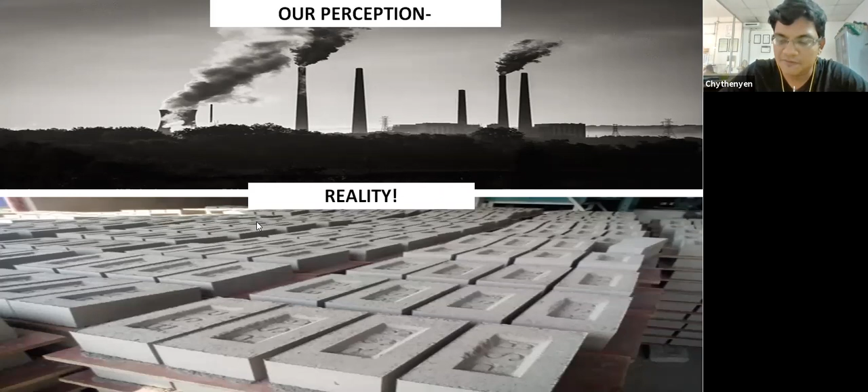Coming to this problem, what we look at today as waste - India is the second largest producer of municipal solid waste in the world at a whopping 1.5 lakh tons of waste every day. And 50% of this waste is wet waste or organic waste. So this is one problem according to us.

And the second problem we are facing today is the huge energy demand. India is the second largest consumer of LPG, liquefied petroleum gas, at a whopping 24.9 million tons of LPG in the year 2018 and 2019. This is a straight jump of 53% just 5 years back. So the energy requirements of this growing developing country is increasing day by day, and we today are looking at it as a problem.

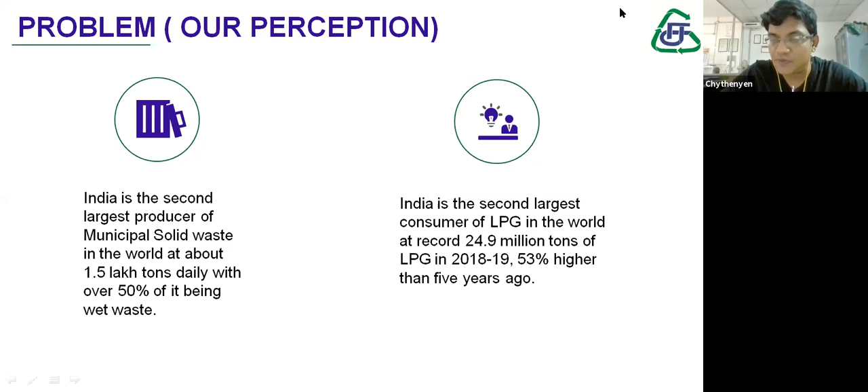So we are here today to change that perception. What if we can use these massive, huge quantities of waste to generate clean fuel? What if we are able to manage all of this waste and also produce organic manure? Will that not be very beautiful? Will that not be a very big boon for our country? So how can we do this?

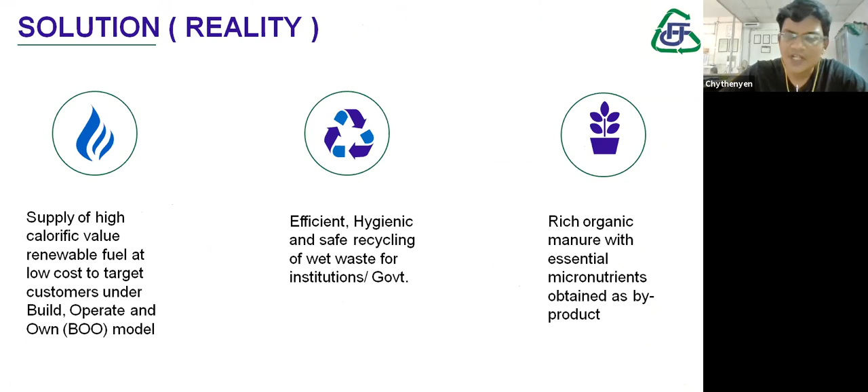So today we are talking about the concept of conversion of organic waste into fuel. The process of conversion of organic waste into fuel is called anaerobic digestion. So we are going to degrade such waste - agriculture waste, food waste, paper waste, waste from cattle, dairy waste - into something called biogas, through a process called anaerobic digestion or biomethanation.

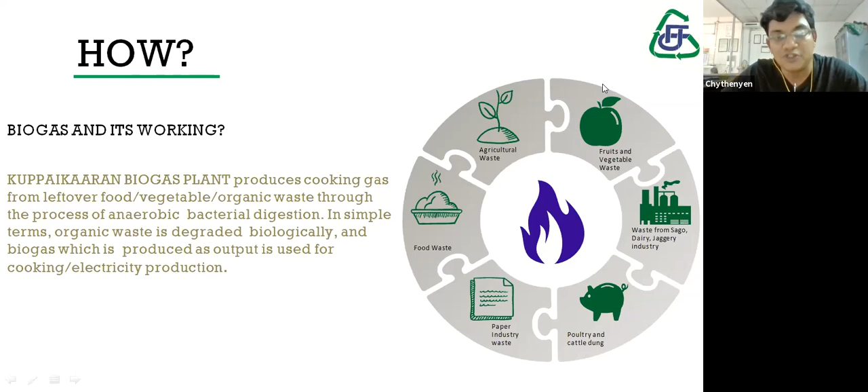In this particular process, we are going to break down these organic wastes with the help of anaerobic bacteria which live in the absence of oxygen, and convert it into biogas. So let us briefly have a look at this technology.

So all this food waste and vegetable waste are broken down into smaller particles. These polymers are broken down into smaller particles using the process called hydrolysis. Hydrolysis means nothing but breaking down - lysis means breaking down, so breaking down of larger molecules into smaller molecules.

That's the first step. The second process is the conversion of this waste into acetic acid - these broken down particles are converted into acetic acid, CH3COOH. This process is called acetogenesis, and the bacteria involved are acetogenic bacteria, which are anaerobic bacteria. The final process is the conversion of this acetic acid into methane and carbon dioxide. As a matter of fact, methane is the cleanest hydrocarbon we have on Earth today.

Methane is CH4, one molecule having one carbon atom and 4 hydrogen atoms. Whereas LPG is propane and butane, which is C3H8. So when one molecule of methane is burnt, we generate around one molecule of CO2 because it has one carbon. Whereas in propane and butane, we have more carbon atoms, so more carbon dioxide is released.

So methane is also called the safest and cleanest hydrocarbon on Earth. This biogas produced out of this process will have around 60% methane, 40% carbon dioxide, and traces of hydrogen sulfide and water vapor.

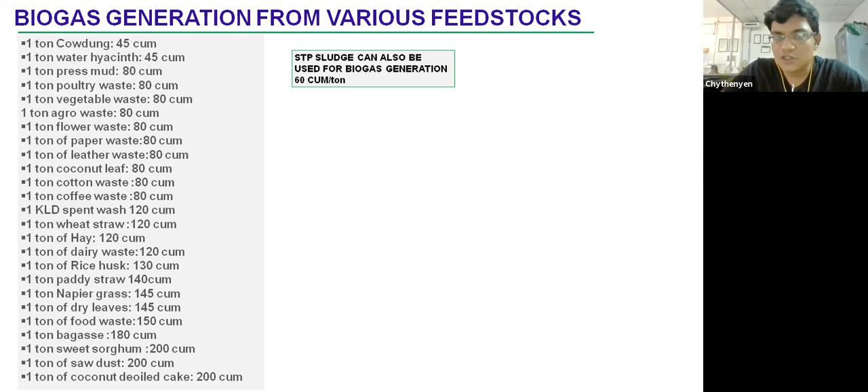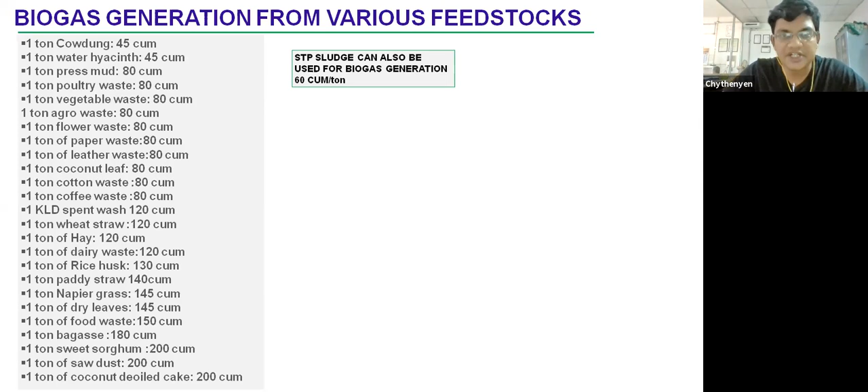We have given an example of around 15-20 different types of waste, right from cow dung to poultry waste, paper waste to leather industries, rice husk, napier grass. There are different types of waste materials which can be put inside this biomethanation plant. We can also use industrial STP sludge from sewage treatment plants. In case your industries or institutions have these plants, you will generate huge quantities of sewage sludge, which can also be used for generation of this renewable energy.

We know that Delhi is the most polluted city in the country. The air quality is so poor that the government has to declare holidays for school going children. We are in such times where the air quality is so poor that there are statistics saying living in Delhi for one day is like smoking 25 cigarettes a day. One of the major reasons for this is stubble burning in nearby states like Haryana and Punjab. When stubble is burnt in these states, the air quality in Delhi goes very, very bad.

So today we are looking at this technology where this very same stubble can be used for generation of clean renewable energy. Even the stubble can be used for generation of high quality biogas, which in turn can be used for various thermal and transportation purposes and even for electricity generation.

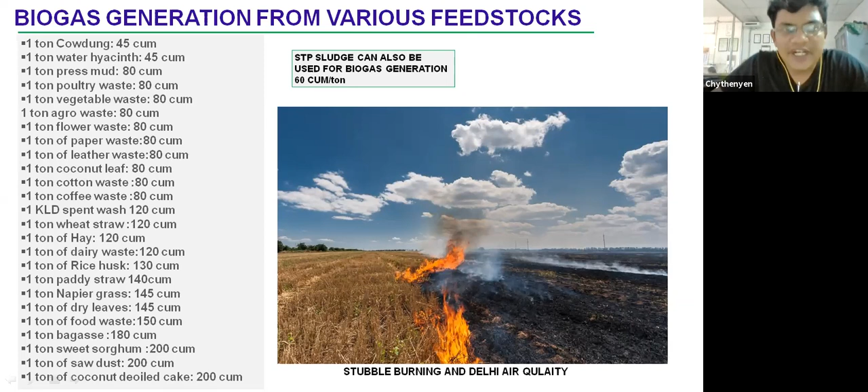Now I'm going to share about our experiences of working with different industries and how different industries have benefited from their own waste, just because their perception of waste was different from the rest of the crowd. Just because they thought this waste can be put to some good use, they have reaped rich dividends. Each and every industry has reaped rich dividends.

I can share first about various industries which have industrial canteens. We have 400 plus biomethanation plants installed in various industrial canteens, wherein their industrial food waste and canteen vegetable waste is utilized for the generation of biogas. This biogas is again used to replace their LPG requirements, so their consumption of LPG has come down drastically by utilizing their food and vegetable waste.

So the second example is the dairy industry. This dairy industry also, around 10 years back, was a highly polluting industry. There were farmers and landowners near these industries who used to come up in arms to these factories demanding the closure of these factories. And the reason? Their wastewater.

I come from a city called Salem, and here we have a dairy which generates around 5 to 7 lakh liters of wastewater daily. 10 years back, this wastewater treatment was a huge problem for them. But then this wonderful technology of generation of biogas from wastewater was developed. Waste, which was once considered a huge problem, then became a boon for them. They started generating biogas out of it, and today their entire wastewater treatment is run from the electricity generated from this particular biogas.

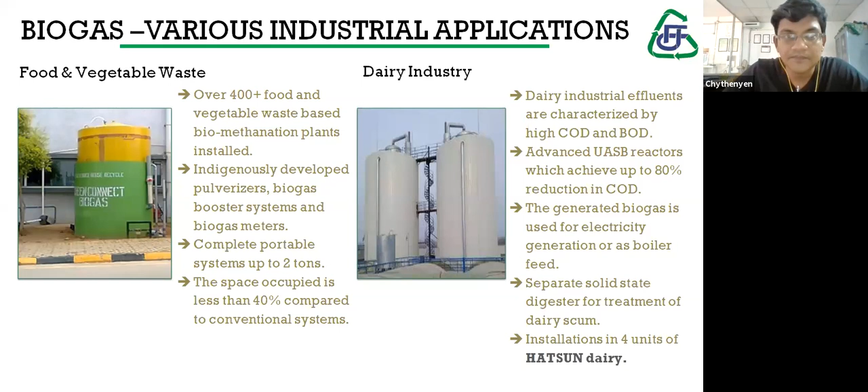The next is the paper industry. The paper industry also has huge quantities of wastewater generated in the process of manufacturing paper. So this wastewater, which is high in chemical oxygen demand, is utilized for generation of biogas. And then we have the poultry industry and the cattle dung.

So in the poultry industry today in Tamil Nadu, Namakkal is number one. In fact, for the entire country, Namakkal is the egg supplier. They are the leading producers of egg and chicken. So these industrial belts, these clusters, have huge quantities of poultry litter and related waste. This poultry litter can be utilized for generation of biogas and conversion of that into a very good fuel.

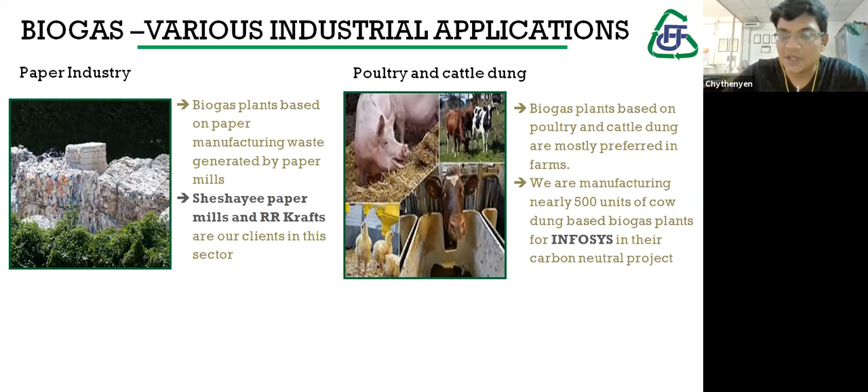And then we have experience in working with PLA, which is polylactic acid. We have worked with this Netherlands-based company called Total Corbion. So these waste plastic cups are utilized for generation of biogas. And also we have worked with the biofertilizer industry, T-Stanes, wherein their media waste is used for generation of biogas.

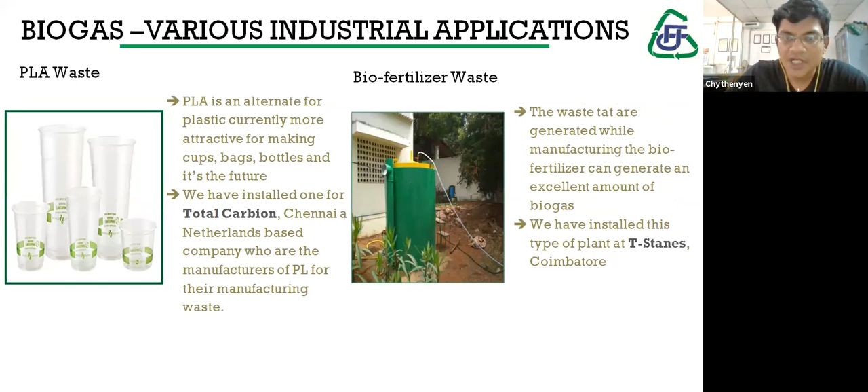And then this is a beautiful project we are currently pursuing along with Infosys. Infosys is the first Indian company to be declared carbon neutral, and Infosys won the United Nations Global Climate Action Award for Climate Neutral Now. And we are happy to share that we are their Indian vendor for manufacturing 500 such biomethanation plants and installing them in various districts of Karnataka. These biomethanation plants are also a part of their CSR budget.

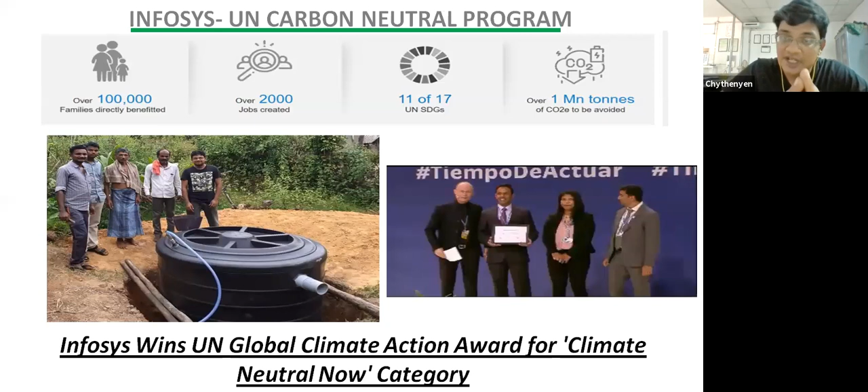And each single biogas plant has the potential to offset about 3 to 5 tons of carbon dioxide every year. And it is fulfilling around 11 sustainable development goals of the United Nations, including poverty, zero hunger, clean air. People living in remote villages use firewood, and when they use firewood for cooking, the smoke affects their indoor air quality and causes various health problems. So the alternative is a clean renewable fuel obtained from their cattle dung and other household waste. That is one more example of our project.

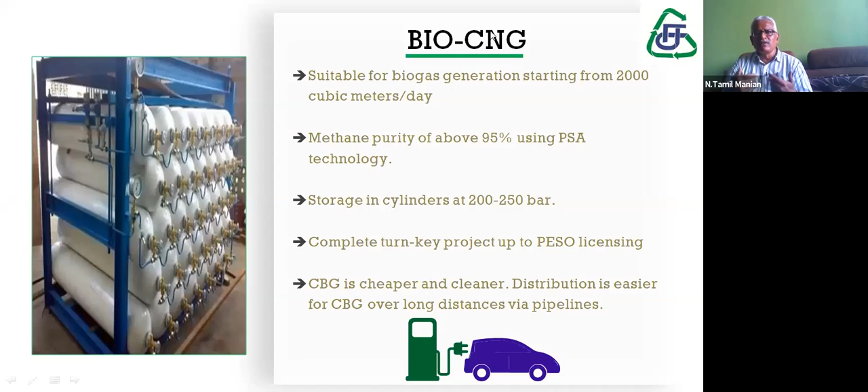We have understood what is need and what is want. Because of the economy, we have been buying; we want our life to be very easy. So we invested in the product and its packaging, but we only use the product. Actually, I need only water. Why should I buy it in a bottle? I need only paste. Why should I buy it in a plastic tube?

Those things we have forgotten because of convenience. We have adapted to certain things. But now we have realized what we have done for the past 30 years and how it has been impacting. Nature is something we all consider as a god. When we don't respect the god, that will have its own repercussions. So with this small background, the next level of using biogas. What is the biggest challenge in waste management?

As everybody knows, collection and segregation are one of the biggest challenges. And one more big challenge we have observed during our experience is the quality and the quantity of the waste. With a smaller quantity, it is not viable for bigger companies to do the larger things.

Though we can talk about it, as Mr. Sarendra Singh always tells me, there are people who only talk, but there are very few doers. So what can we do? Can we do something on that? Then with the input of my friends and my colleague, Mr. Chythenyen, and with people like IWMA and the industry, we thought that though we have been using biogas on a captive use, wherever the waste is generated, just to manage their campus and make it zero waste, and we are converting that into energy.

Then we thought, why don't we do that? And not only we, as an industry, this bio-CNG concept has come out for the past 2-3 years. And I'm really very sorry to say that North has taken this as a boom. A lot of plants have already been established, especially in Gujarat, Maharashtra, Madhya Pradesh. But South has now opened up their eyes, and they are also going to bring these bio-CNG plants.

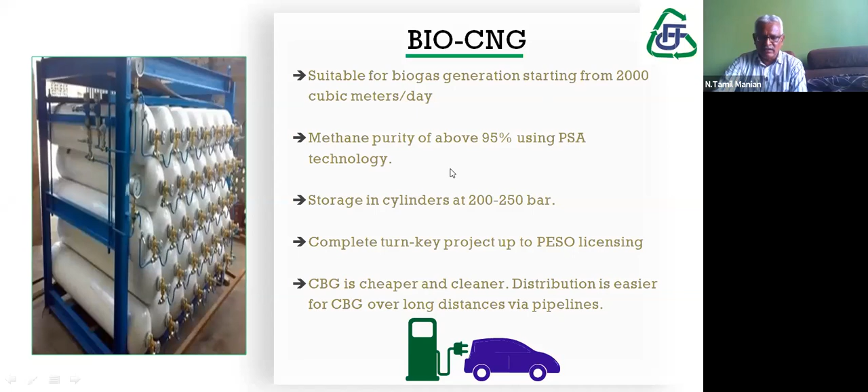Compressed biogas is cheaper and cleaner, and distribution is easier for CBG over long distances via pipeline. Even the Government of India is laying pipes through the country for the supply of these natural gases. Okay, next. Just to give a brief, this is compressed biogas, a new revolution in transportation fuel, which has been supported by a scheme of the Ministry of Petroleum and Natural Gas. The scheme is called SATAT.

SATAT is a scheme which supports the mass production of bio-CNG as an automobile fuel. It is jointly done by the oil companies like IOCL, Bharat Petroleum, GAIL, Indraprastha, and all these oil companies throughout the country; they join together and support this program called SATAT. The only requirement is to generate around 2,000 kgs of CNG equivalent gas, so that they will buy it from us directly.

The oil companies will buy the stock. Whatever we produce, the gas will be purchased by the oil company and redistributed through their petrol bunks or fuel stations. And the next thing is, we also generate around 14 tons of organic manure out of it, which central government organizations like IFFCO support us in marketing. So this is one of the good schemes which has come to make waste into wealth.

So I only request that people, wherever possible, make use of this waste and make it wealth. Today cow dung is costing about 1 rupee per kg. Tomorrow, I don't know. The commissioner of Chennai was telling us one day, maybe after 10 years, we have to pay at least 1 or 2 rupees per kg to buy the waste to generate something else. That day is not so far. So before that, we would like to utilize whatever is available in a more circular way. And next.

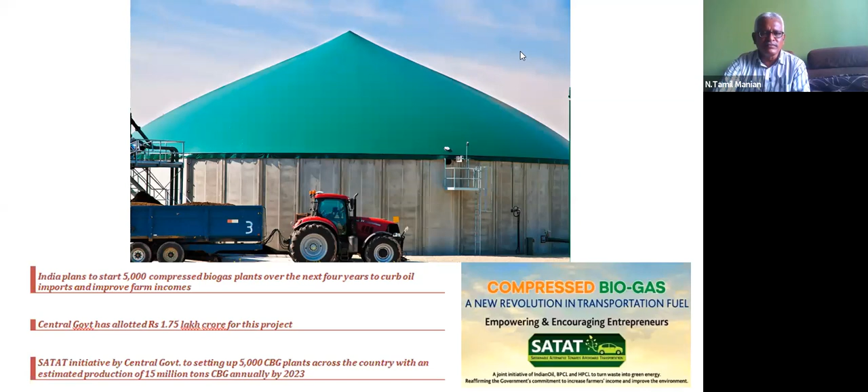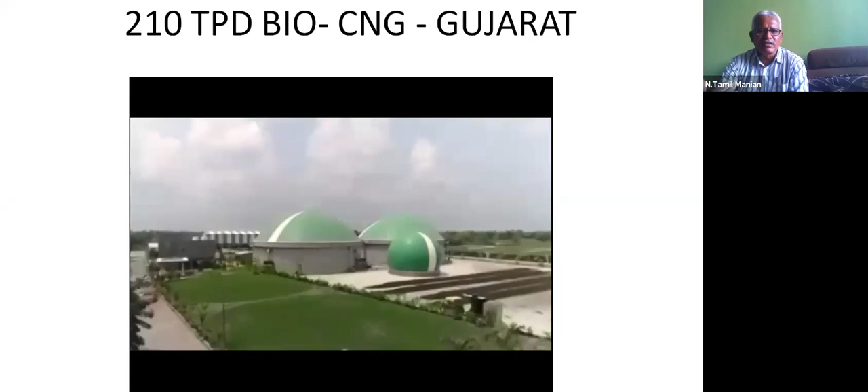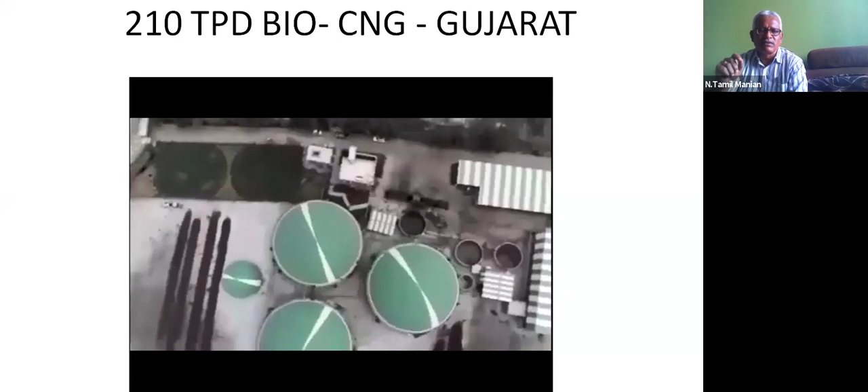And he has got a lot of agricultural waste. As you can observe, you have seen 4 domes. The 3 are the digesters, each about 70 tons. The smaller one is the alternative digester. This project was done about 4 years ago, and even as of today it is one of the largest bio-CNG plants in India from a private organization. The gas is now supplied to any of the oil companies.

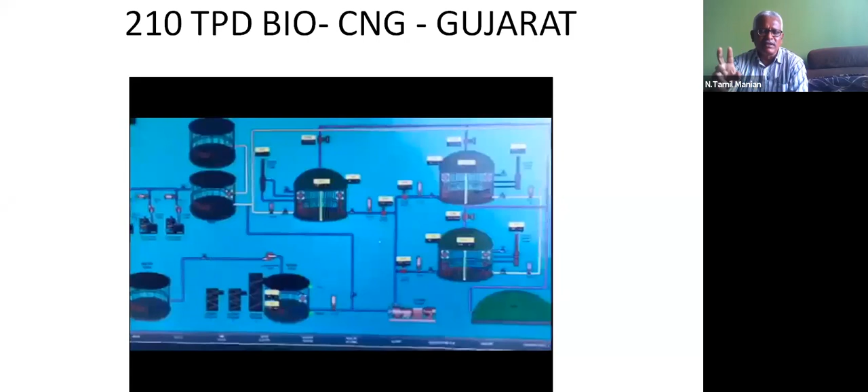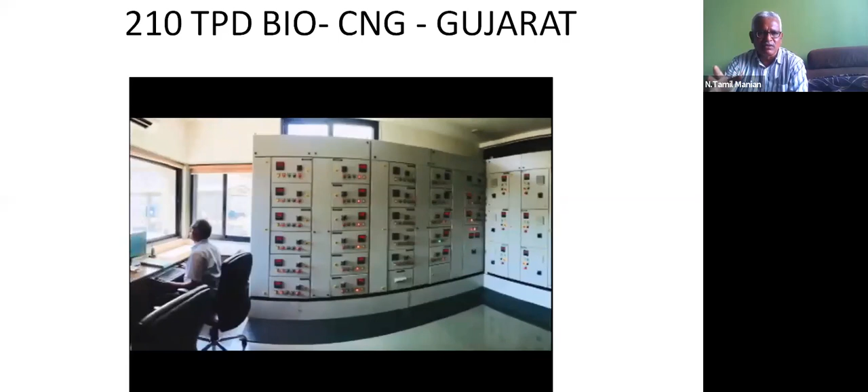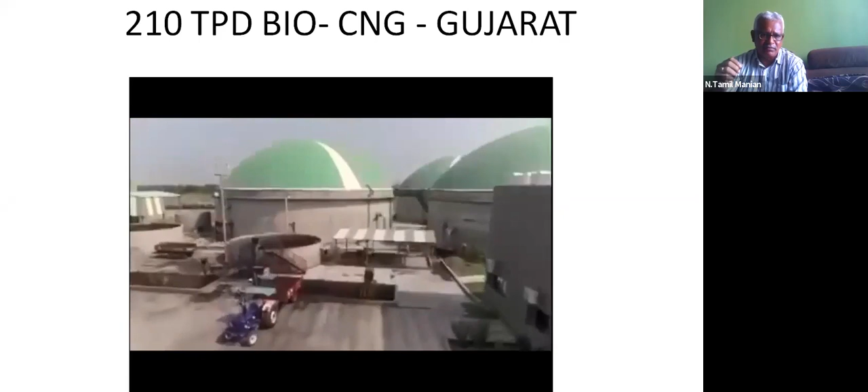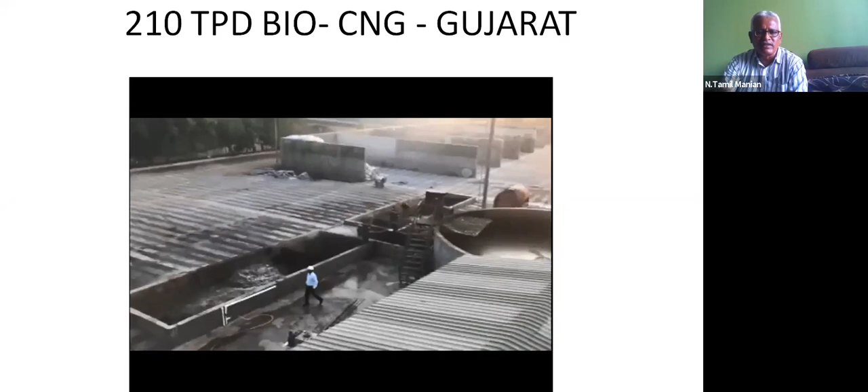He gets the waste from the Amul factory and factories which manufacture chips, like Pepsi. They bring all that waste here, use multiple wastes, and generate around 7,000 to 8,000 kilos of CNG every day. As we can observe, it is a clean industry. It is not human dependent; all is automated with SCADA and the technology, and the best part is you will not find even a single smell there.

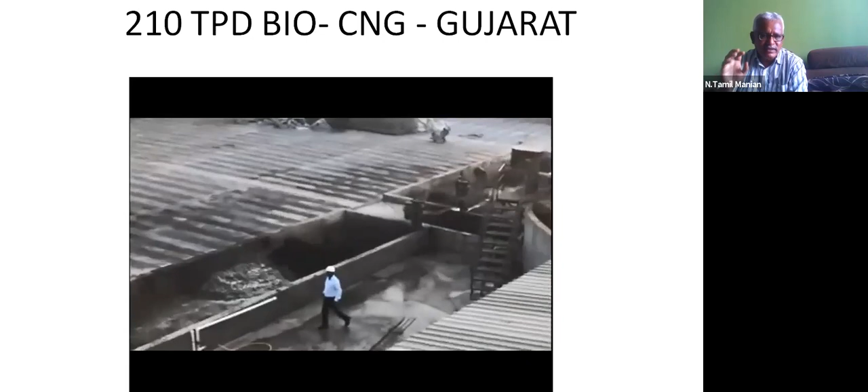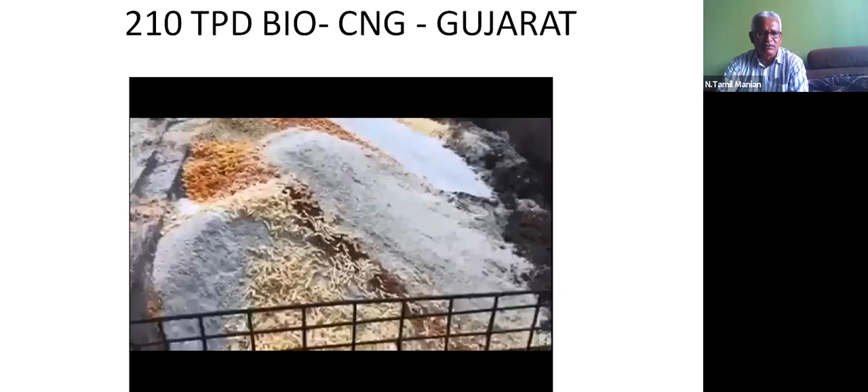So this inspired us to do something here in our part of the country. Certain initiatives are taken, and we are happy that we are also going to bring some projects in Tamil Nadu very shortly, in another 6 months, because COVID is delaying it. Otherwise, we will be doing that shortly.

So Chetan, close. Chetan, next.

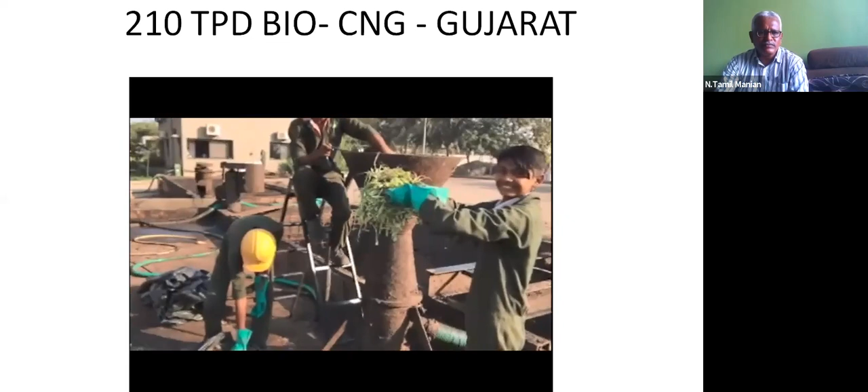Sir, so now having given the background of what is biogas and what is bio-CNG, I am also asking a question to all of us: what is our perception about this slide or the picture you're seeing? I'll be very happy if some of my participants can answer. Food waste, fantastic. Food waste from Mr. Tirupati, a hotelier, president of the Madurai Tamil Nadu Hotel Owners Association. Welcome, Mr. Tirupati. A hotelier sees that as waste. Anybody else? Organic waste generated. Thank you, Subhankar. Organic manure. Very good. Everybody has got their own ways of seeing things.

Two participants raised their hands. If you want, please allow them to ask questions right now. Vignesh? Yes, sir. Just a minute. Or we can have a Q&A session at the end. Oh, fine. No problem.

Sure. So everybody has got their own perception. We see this in different ways. Fine. Excellent. Next.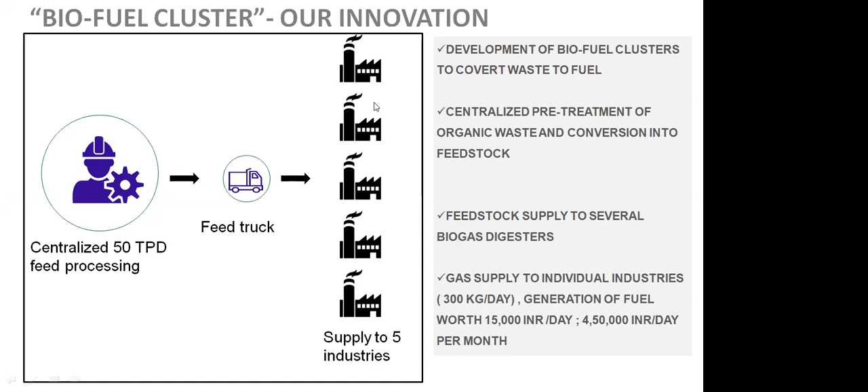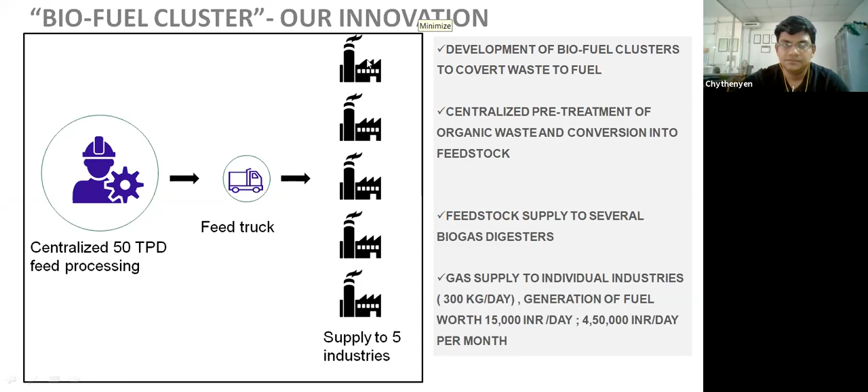And before getting on to our innovative thought process in this, thank you very much for your feedback. And before that, let me also have a poll. Mr. Vignesh, I would like to just know the poll. Yes, sir. Just a small poll. I just like to know the usage of LPG. Sir, is it visible on the screen? No, not yet coming. I think everybody can vote in the poll by going on the top. There is a small icon called polls. So you can click that and give your feedback. Participants can do that. Okay, otherwise forget about it, as we are running short of time.

I just want to know how many of us, being the industrial partners here, are using more than about 300 kgs of LPG per day, and if so, how much? That is the only question, so that we can elaborate it in a much better way. So coming back to our discussion on the biofuel clusters and our innovations.

As we have heard about biogas as a captive use within the company with their own waste, used as captive power. Next we talked about bio-CNG. We do the bio-CNG, compress it, and supply it to different places in cascades. And what we thought about is a combination of both. A CNG plant costs crores. We had to invest about 9, 10, 15 crores for that.

But not all industry friends may be able to make that kind of investment. And during my interactions, we came to understand that they also like to be environmentally friendly as we are. But we have to support them. So how can we support the industry? We have a good relationship with the IWMA, always interacting and participating in their programs. We came to understand that the issue is the captive investment first. I cannot invest that much, and where will I go for that kind of waste?

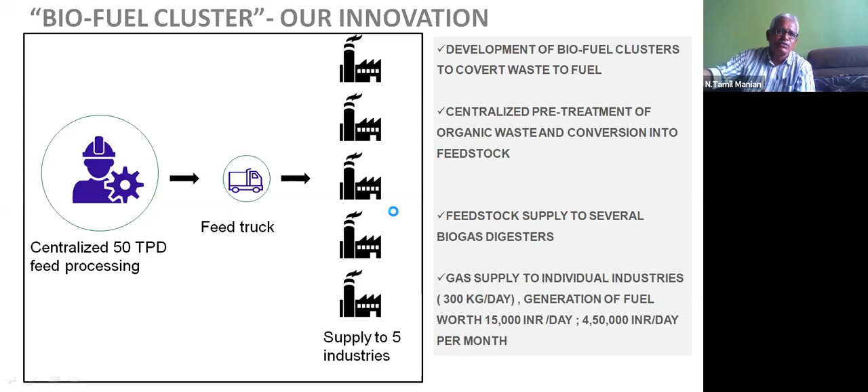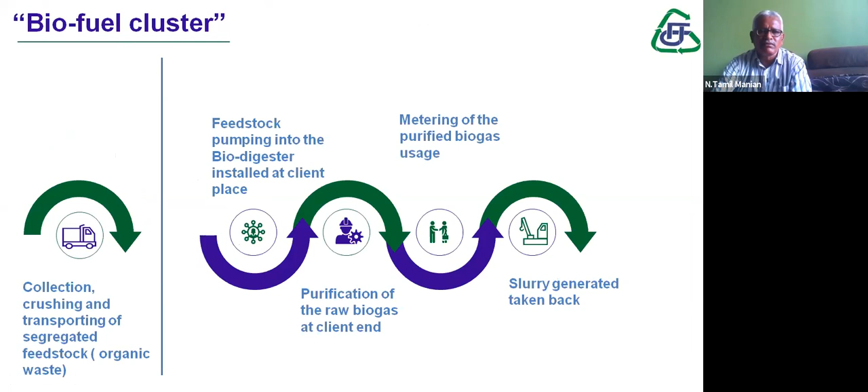Even the ROI is one of the earliest, and this will be useful for another 15 to 20 years, where this technology can be used to reduce the manufacturing cost itself. So the production cost comes down. And how the biofuel cluster works: this is the collection point, which will be outside the industry. At the industry there is the feedstock, purification of raw biogas, and metering of the purified biogas usage, and the slurry generated will be taken back by Kuppai Karan.

So we will take back even the waste which comes out after manufacturing the biogas, methane. We will take the slurry back to our collection point, so nothing will be left in the industry. We make it cleaner, systematic and closed. And this waste, which we perceived as nothing, is going to be a profitable proposition for the industries. And that is not all; what are the impacts?

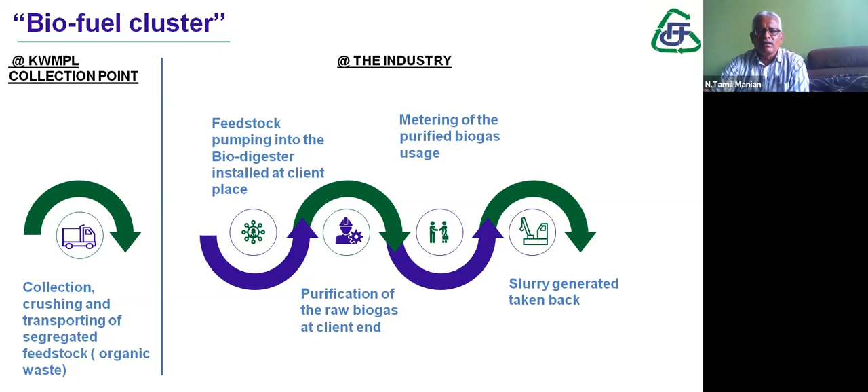Not only the fuel, but it not only improves the circular economy but also reduces the cost. Transportation is minimized, crushing is common, digestion takes place there, with purification and direct utilization, and there is almost around 50% reduction in the process, 50% reduction in transportation, and no on-site waste handling. What I mean is, we don't handle the waste within the premises of the industry.

We do all those things outside the industry and bring it in slurry or semi-solid form. We just pump it into the digester. Then automatically, on a daily basis, they will produce their required energy. If it is a 10-ton plant, the minimum expected LPG equivalent methane per day is around 300 to 320 kgs, as discussed in the previous slide. It's almost around 15,000 rupees. So whatever we design, the return on investment has to be within about 2 years maximum.

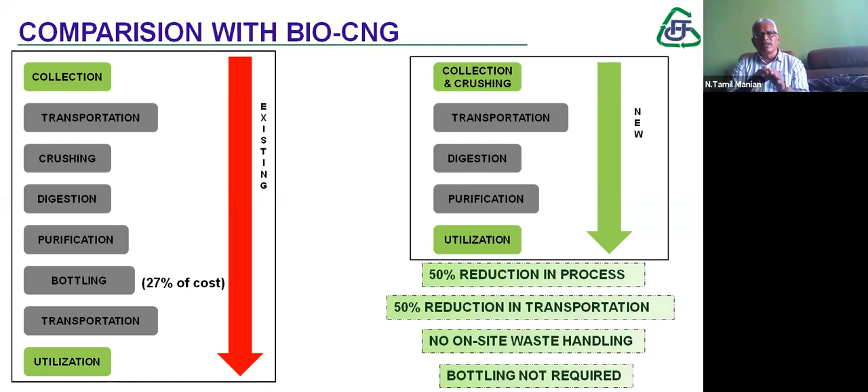And today, what is the advantage? There is waste which people don't know how to manage. And we in Kuppai Karan don't talk much about management. See, management is to cover up. Rather than covering up, we want to give a solution. We will use the waste, and even the slurry becomes an organic manure that again goes to the land. So it is again a circular form. Next.

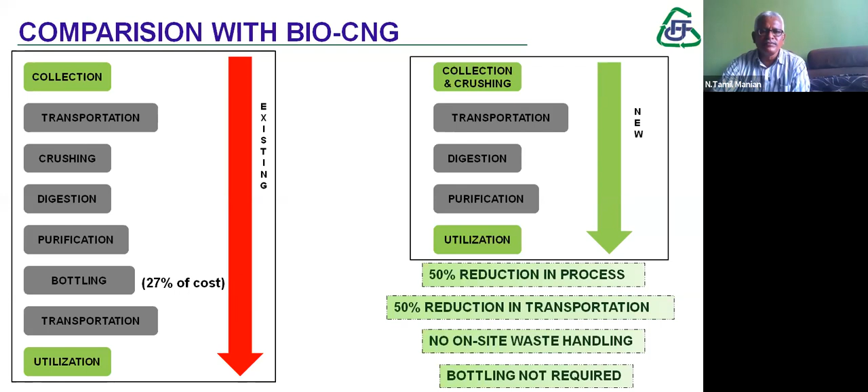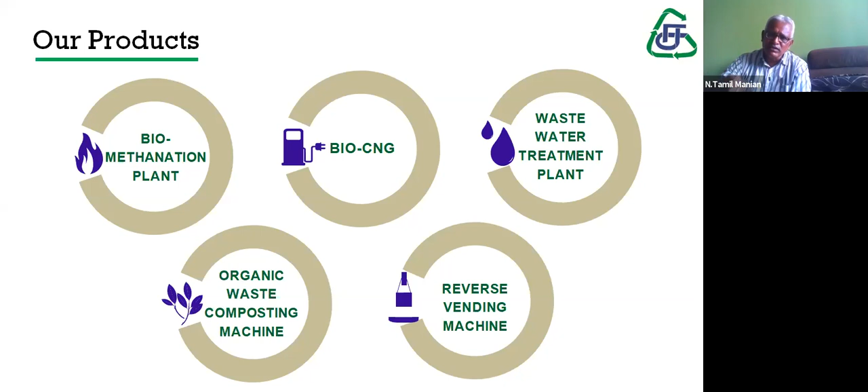The waste bottles are put in, and people are incentivized to put the bottles in the right way, so they go to the right customer, the right recycling people, so it's done properly. This reverse vending machine is part of improving the circular economy. In European and other developed countries, these reverse vending machines are available in almost all key department stores. People put bottles in, get incentivized, and use that money to purchase other products.

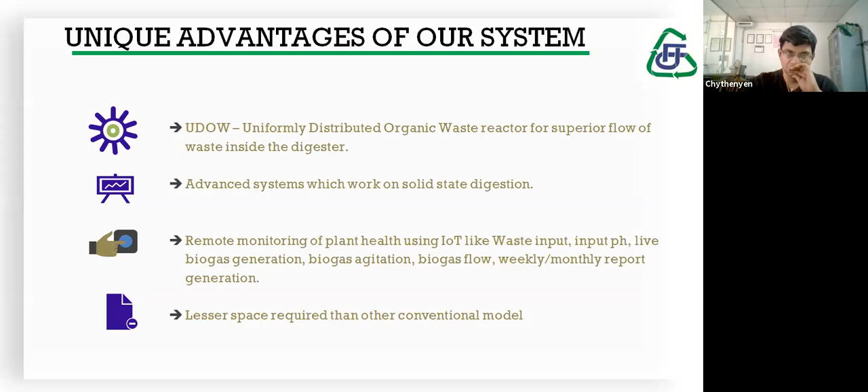We use a unique technology in our biogas system called UDOW, Uniformly Distributed Organic Waste Reactor, for superior waste distribution inside the digester. It's an advanced system that works on solid waste, solid state digestion. We have remote monitoring of plant health using IoT for waste input, biogas generation, biogas agitation, and biogas flow, all monitored remotely. We also require less space than other conventional models like bio-CNG.

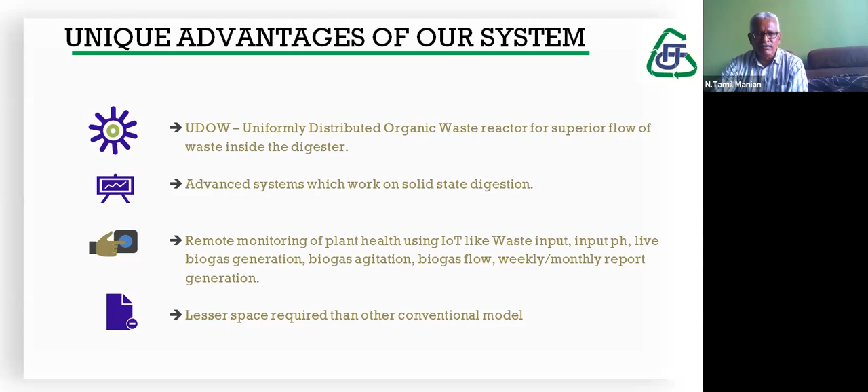We are also into EPR, Extended Producer Responsibility, with our associate companies. We are happy to share that we are the Swachh Bharat Ambassador for Salem Corporation and Madurai Corporation.

Thanks to IWMA, we successfully organized the first Energy, Waste and Environment Expo in December 2019 for 3 days. I'd like to thank Mr. Bhaskaran, who was part of the inauguration panel. Along with MMA, we worked with Chennai Corporation, IWMA, MMA, Pollution Control Board, and all major associations participated with us.

We brought almost around 70 participants throughout the country. As I was telling you, I was so impressed to see many colleges now taking this up as their course on waste management.